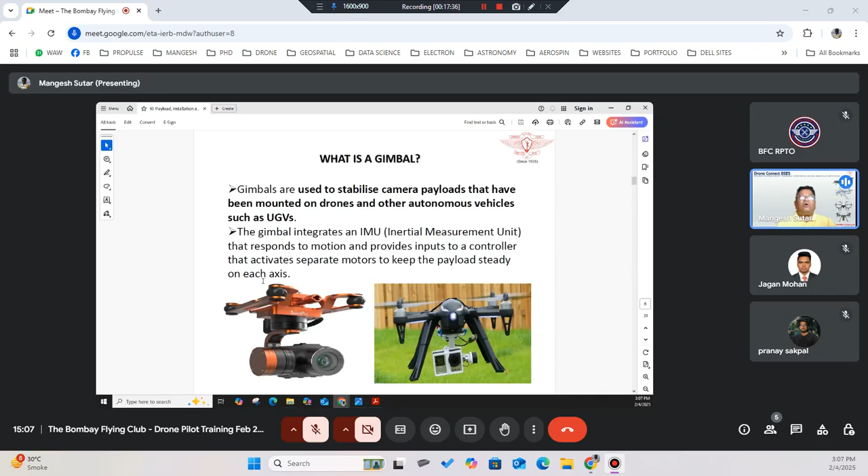Types of electro-optic payload. So different types of optical payloads you have. RGB camera is there, thermal camera is there, lidar is there, or multispectral cameras. So there are different options. The cheapest one is the RGB cameras, but from a perspective of what you are actually looking to capture, normally you will see a Sony camera attached as an RGB camera which has 20x optical zoom and 20 megapixels, or sometimes even 50 megapixel cameras are there.

Okay, then you have thermal cameras, which are very expensive. They range between 2 lakh rupees to 6 to 8 lakh rupees. Even lidars are in that range. I think lidars are somewhere around 8 lakhs, 10 lakhs, 12 lakhs, 15 lakhs, depending upon what kind of lidar it is, what purpose, and how big the lidar is. Even the multispectral cameras we use for mapping, survey, or crop monitoring applications, or even hyperspectral cameras, range somewhere around 4 lakh rupees to 10, 20 lakh rupees. Okay.

So what does RGB camera do? It's nothing but like a human eye, which is sensitive to red, green, and blue bands of light. Most standard drones come with a camera that captures the same RGB band, so the image they produce recreates almost exactly what our eye sees. It's like a normal mobile camera, but these are more optically efficient, and sensor-wise also they are more high-end, which will be able to capture the light properly so you see what you're supposed to see when looking at that object as it's been captured.

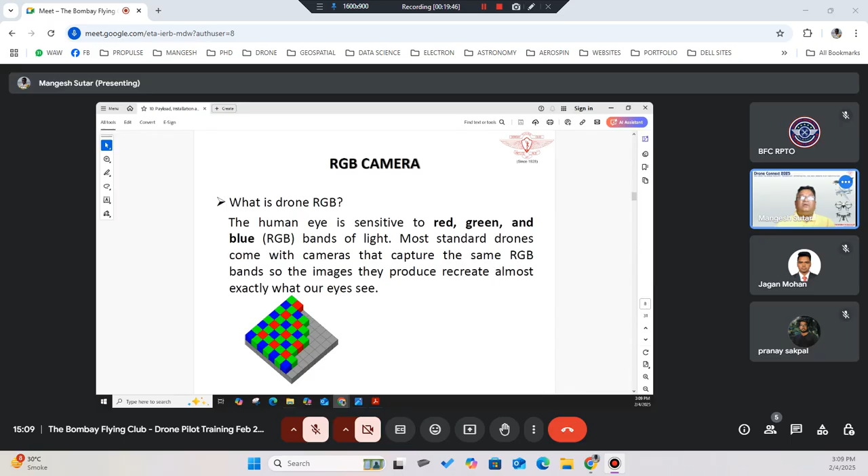So what does drone RGB mean? An RGB camera on your drone can see your entire field in one place by processing aerial images into orthomosaic maps. You can quickly make observations, enter the geodata into GPS, and drive to the problem areas without damaging your entire field.

So it will capture the data in different angles and pictures. But whatever data you see on the screen will not be immediately available in that form. There are separate softwares required, multiple softwares needed to convert that data into orthomosaic maps or three-dimensional maps. So you feed that data, those images, into the software and create that structure. You create the different types of maps required for your analysis purpose, or for any customer or vendor who has requested this kind of activity. You need to have that software.

Like there's the QGIS software, or... not Pixel, what is it called? I forgot the name, I have a slide, we'll talk about it.

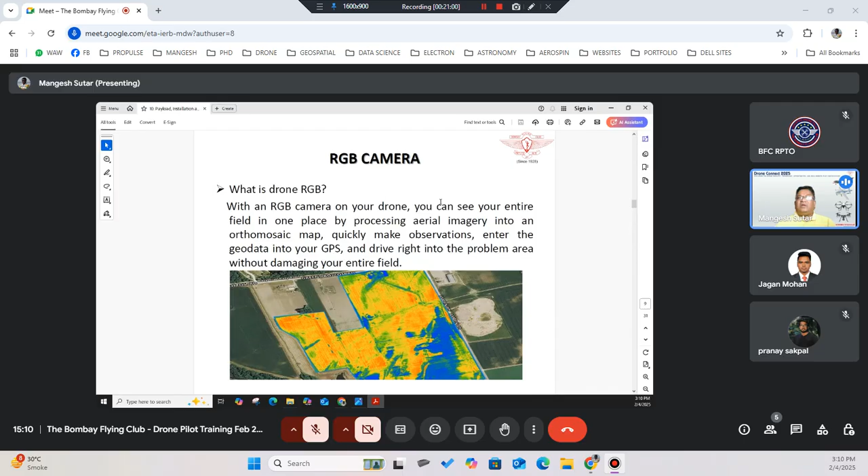So what is an RGB camera? RGB is again a visible camera sensor that collects visible light in 400 to 700 nanometers and converts that into electrical signals, organizing that information to render images and video streams.

So the image you see will be in a very raw format. There will be separate software which will convert those images into a useful format for analysis perspective. Like in the picture, there's mineralization, seed rate, soil organic matter, denitrification zone. These are the images converted using photogrammetry softwares.

The features of the payloads - when using the payload, you can capture not only photographs but also videos. There's object tracking also. But these are additional softwares which would be required.

Let's say I was seeing one of the drones where it was able to chase a car. The camera and software running on the drone has a separate unit which keeps tracking the particular device and gives signals to the drone, and it keeps tracking it.

For example, there was a chase happening between the car and police using the drone for chasing them. Earlier, people used to follow the car normally on the road, but now drones are used to track or chase particular criminal locations and vehicles. They have that facility of AI-driven cameras which identify the number plate, identify the car, and keep tracking as the object is moving.

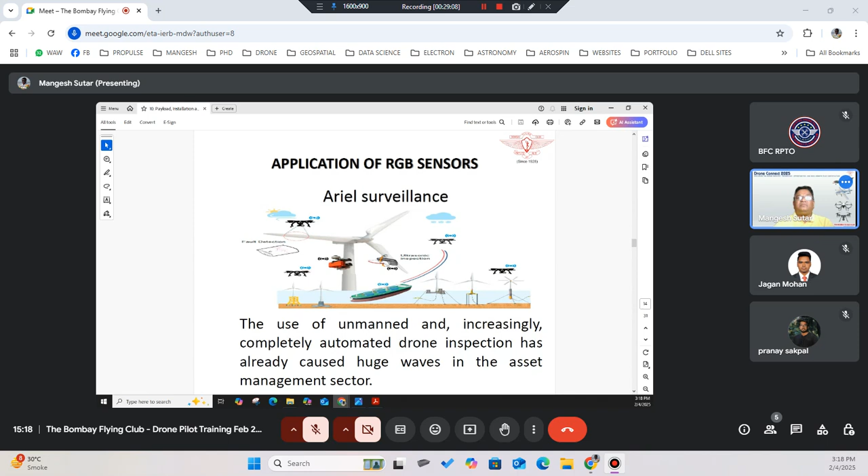Applications of RGB sensors: you can use it for solar farms, wind farms, railways, bridge inspection, power lines, mobile phone towers, oil and gas inspection, water pipes, building and construction.

We had done one small POC for Reliance. They have a refinery in Jamnagar. So all those oil and gas pipelines which flow from the refinery to X location, they asked us to fly the drone and provide data about the pipelines laid on a regular basis. It was almost 20-25 kilometers of area which needed to be covered, which was external. Most of the time these pipelines are underground or within the ground, but there were some places where they were above ground, so they wanted us to see if drones can be useful to monitor these kinds of installations, oil and gas pipelines.

A lot of times you will see these oil and gas pipelines also going through very remote, dense forest kind of areas. Even water pipes, like Mumbai is supplied water from Vaitarna or Tansa lakes, the distance it covers from those lakes till the Mumbai filtration plant is very huge. A lot of times we have seen people break the pipes or make a small hole in them, and you will always see leakages of water and loss of water. So you need to keep monitoring these pipelines on a regular basis.

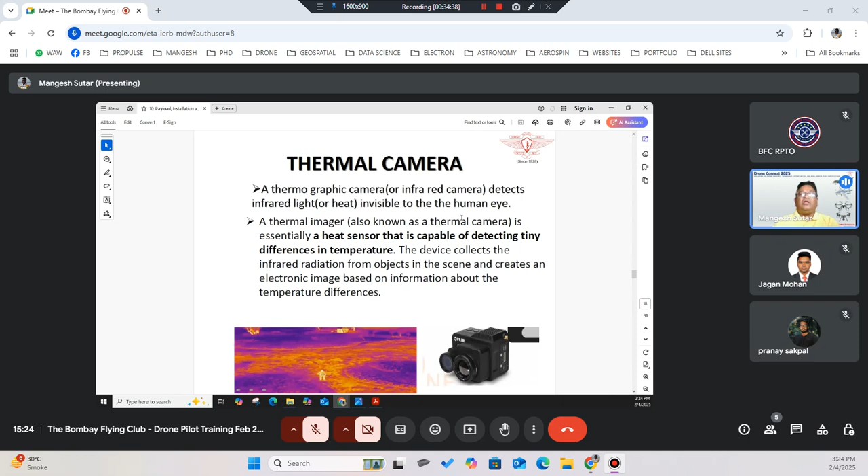Their metal has become corrosive, or wires have become corrosive - all these things are not visible to the naked eye. So in thermal images, you are able to detect these differences in temperature, because different parts of the material will give different heat signatures. These thermal cameras collect the infrared radiation from the object in the scene and create an electronic image based on the information from the temperature difference. Once you know the temperature and are able to read the thermal inputs, you will be able to tell whether there is a problem in that particular material or image, and accordingly take corrective actions.

Application of thermal payload was originally developed for surveillance and military operations. Thermal cameras right now are widely used in building inspection, like for moisture detection.

For example, there might be a leakage in your building. You won't be able to see or track from where the leakage is happening. You might see the wall has become wet, but you want to find the source from where the water is coming. You can always use thermal cameras to detect this, because the leaking part will be colder and the remaining part won't be. So you can track and find the source of the leakage, or how the water is flowing inside the walls, by seeing the temperature difference in the wall and the beams.

Again, applications include firefighting, autonomous vehicles, automatic braking, skin temperature, industrial inspections, solar panel inspection, power line inspection, pipeline inspection, and wildlife monitoring.

A lot of times, from the outside, a pipe might look good, but it might have gone bad, maybe rusted within the material. Just because of stress, the material might have gotten very weak, and it's possible the water pipeline might break one day, leading to a leakage situation. Rather than waiting for that reactive situation, we can run a thermal payload, capture images, and see how the structure of the pipe is. Based on that, we can decide whether it needs repair or remediation, so that major faults or major loss of infrastructure or resources don't happen.

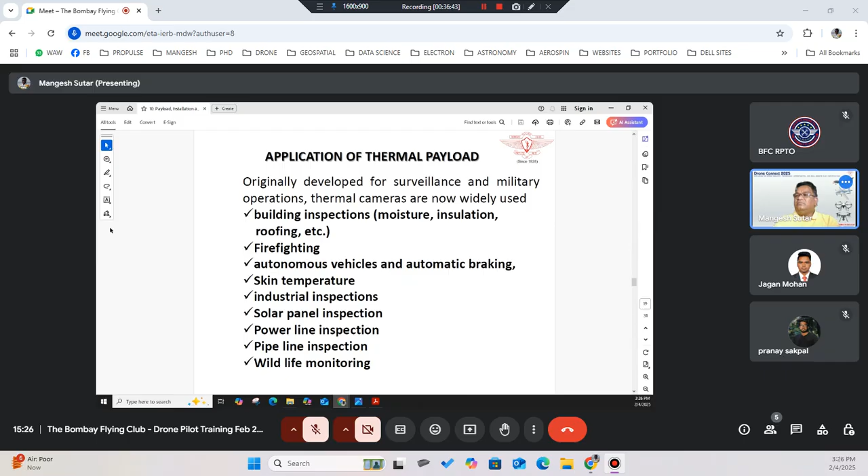You can see the picture of the building over here, showing moisture, insulation, and roofing.

In firefighting also, when there is a fire, the building shows up completely red and yellow in color. The people there are also shown in red because they have body temperature. Whereas the ground shows up in blue or violet color because it's a cold part. Even the pipe shows in blue color because there is water in that hose pipe.

Also in autonomous vehicles and automatic braking kind of applications, you're able to see the images in infrared and how they look.

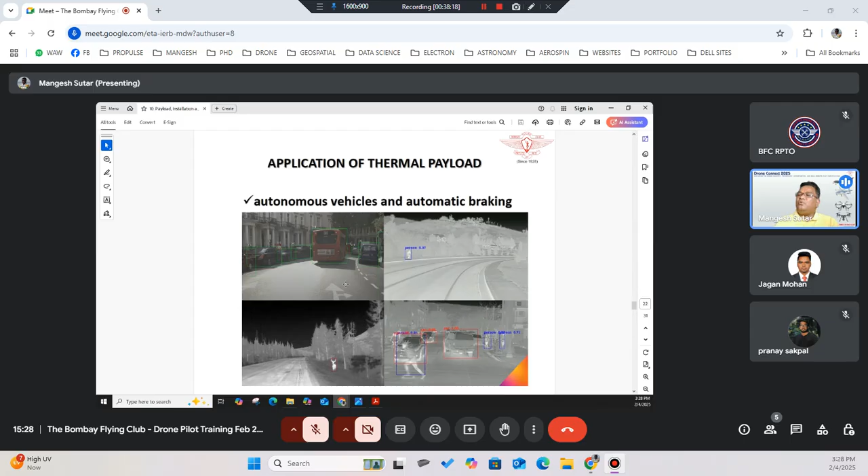There is a huge amount of study going into this. This is what we call image study or GIS study, where RGB, thermal, and lidar data are all taken together, and you train the software to interpret the data. You may have the same image in RGB, the same image in infrared, and the same image in lidar, and then try to correlate and understand what could be the anomaly in that particular image. Then you train your software accordingly, so that every time you don't need to manually find the faults or issues.

Like here, you can see the skin temperature.

This was very much in use during COVID times, where people wanted to monitor the temperature of a person, whether he had a fever or not. So without touching him, without getting in contact with him, remotely, just by flying a drone over people, you are able to take their temperature as required.

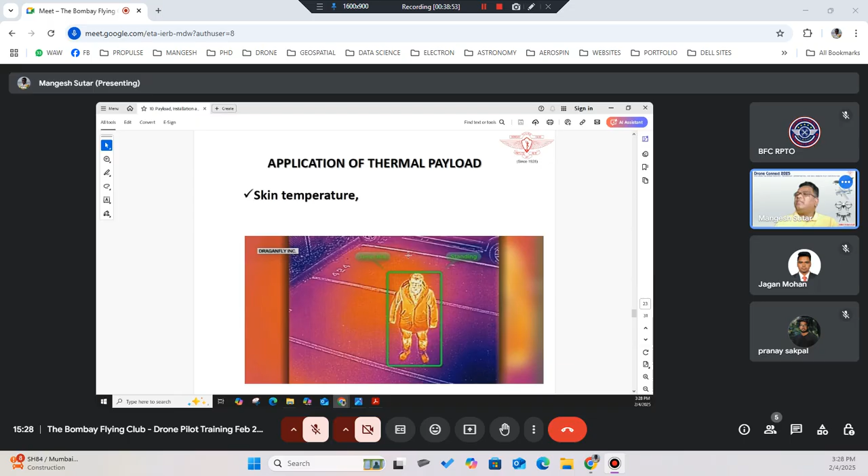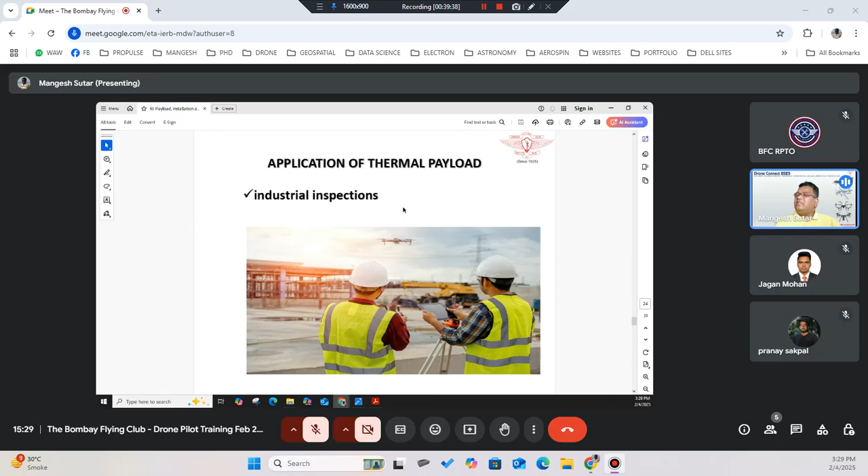Again, in industrial inspections, thermal is very much used after RGB. Thermal is very much used in construction sites, infrastructure related projects like windmills, power lines, gas and water pipelines, and industrial inspections like big manufacturing plants or refineries. In all those locations, thermal payloads and thermal cameras are being used extensively, so you don't need to monitor or physically go to all the locations. Your drone with the thermal camera is able to take complete footage, and then you can sit down, analyze all your footage and images, and accordingly make a report.

It uses light energy emitted from a laser to scan the ground and measure the variable distances. Using those signals, it tries to create the image out of it. So this is something you are doing in a reverse way. LiDAR, which stands for light detection and ranging, is a remote sensing technology. Earlier, this was primarily used in satellites, or even in surveys. People used to put the LiDAR on a car and survey the locations. But earlier LiDAR was not so much available for the drone as a payload.

But recently, a lot of development has happened in LiDAR sensors. They have become a little bit cheaper compared to what was available earlier. So they can be used on your drones as a payload, and you can start mapping the surface and acquire meteorological data. A lot of weather, geographical or geological people have started using LiDAR on drones, capturing whatever data they require. It could be meteorological data, geological data, or data for study of different types of applications: agriculture, forest, water resources, any kind of resources useful for human life to sustain at the location.

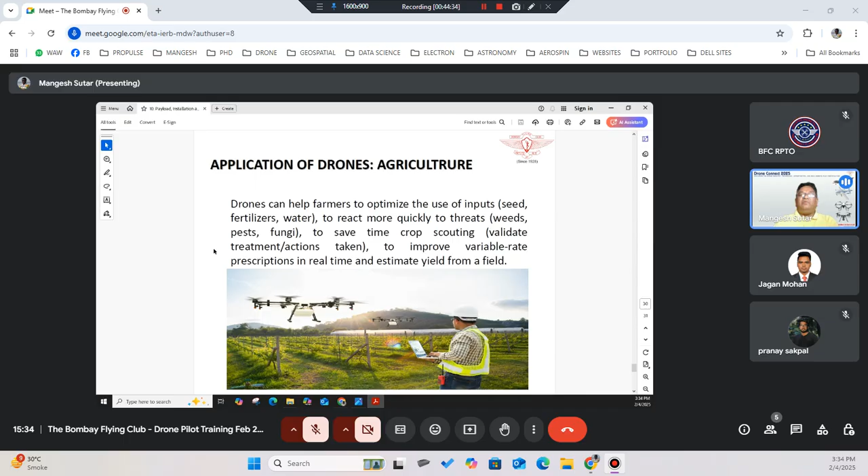You can't go to each and every plant, each and every part of a crop to see what the problem is. But if you fly a drone, it will capture the entire area and give you the data on your laptop or tablet, and you will be able to find out what problem your farm has and in which area. Maybe a small part of your farm has been impacted by a pest or some threat, fungi or weeds. So before it spreads to the entire farm, you can take corrective action in a very short time. That's the advantage of the drone: it gives a complete view of your farm on your tablet, mobile, or laptop, so that you can take timely corrective actions. Okay.

We talk about the application of drones also for advertisement or media publicity and all the things. So you can use multiple or a swarm drone technology where you can fly drones and create a lot of good images in the sky as light shows or advertisement shows.

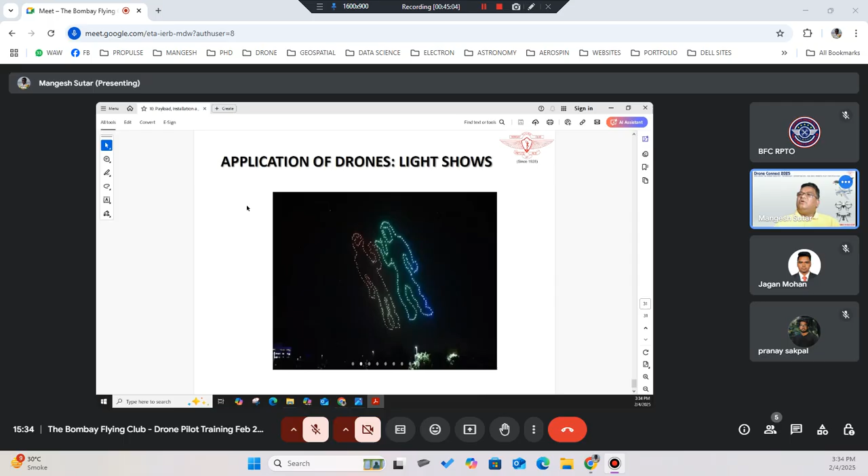Okay. Just the last application. Do you have any questions on the payloads? Yes, sir. I have.

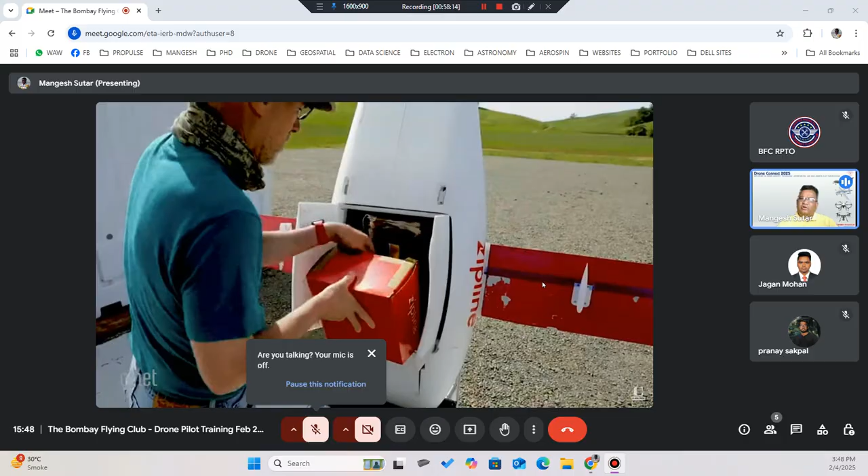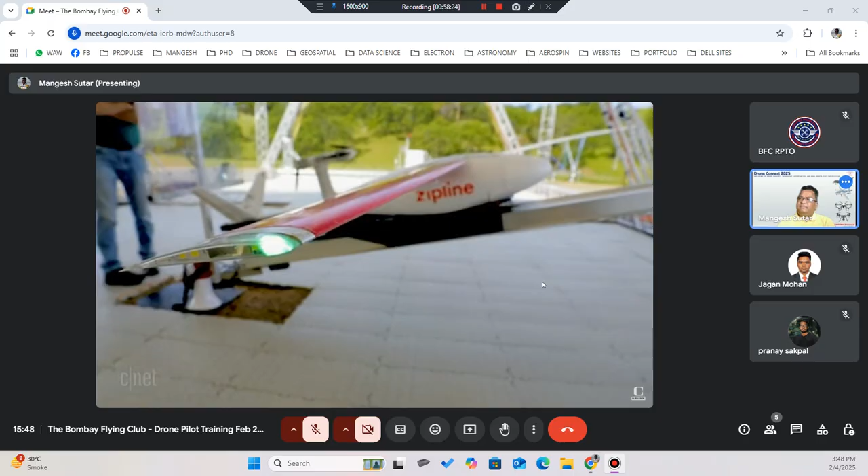Since we started operating our first system in Rwanda more than a year ago now, we've been designing our next generation system from the ground up, incorporating all that experience. Here you physically put the package. So we've had to redesign pretty much everything about the plane, and then this is our systems catapult to support scaled operations. So instead of being able to do 50 flights a day, we want to be able to do 500 flights a day from a single distribution center.

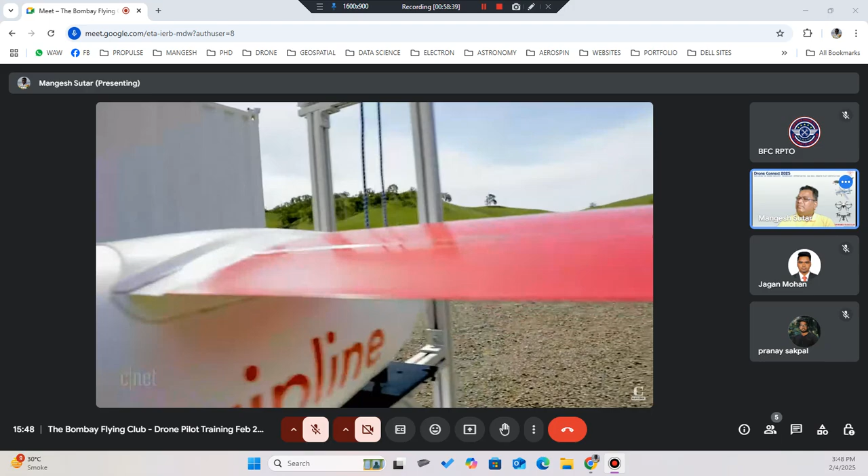We pull the blood or the medical product for that order, put it in a package, put that package into a Zip, and launch that Zip. The aircraft weighs 20 kilograms, about 45 pounds. It has about 10-foot wingspan, 3 meters, and it can carry about 3.85 pounds, 1.75 kilograms.

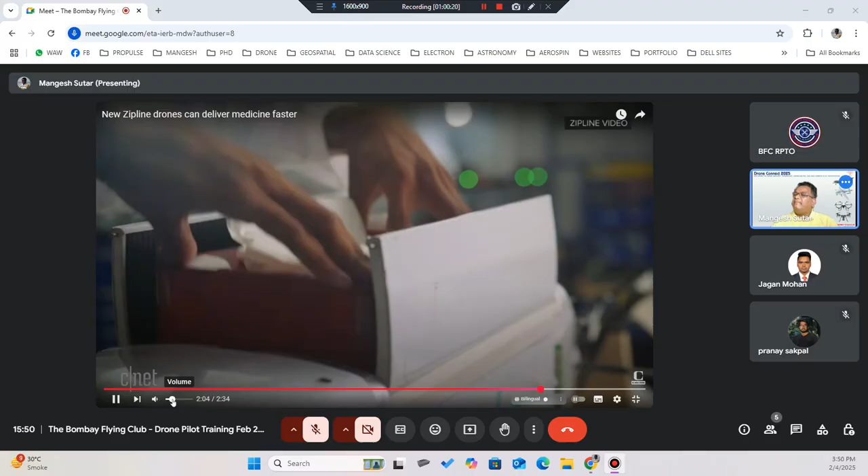Approaches to things like safety are also much easier. On our aircraft, for example, if either one of those stops working, the plane flies just fine. We're in Rwanda today, and we're expanding to cover the other half of Rwanda as we speak. From there, we are really focused on solving this problem, access to medical products at a global scale. There's access to medical product problems in the US and in the developing world, and we really want to solve all of those problems everywhere.

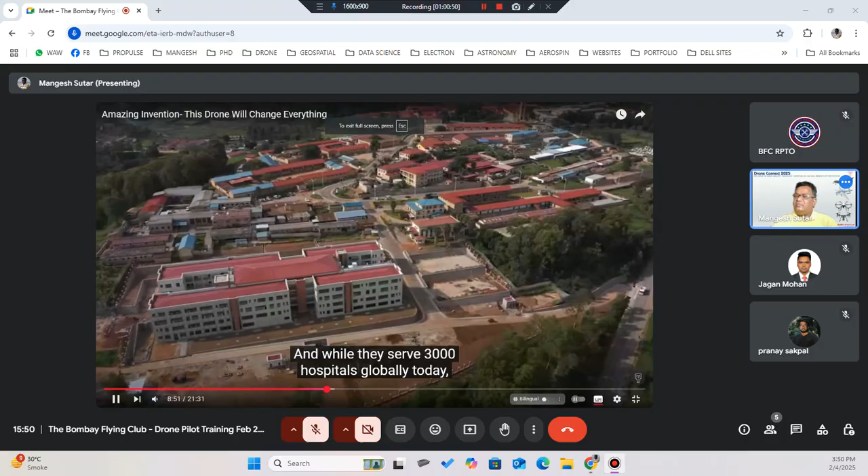And while they serve 3,000 hospitals globally today, that number will be 10,000 by the end of the year. All right, so we've covered their long-range country delivery drones, which means we've now got the context to talk about their short-range city delivery drones.

But first, I just have to interject here and say I was blown away by Rwanda as a country. Right out of the gate, their stoplights are really cool because they're just countdowns till the light turns green. They can balance and carry pretty much anything on their heads. And there's motorcycle taxis everywhere. And given that, when in Rwanda, you do as the Rwandans do. Whenever possible, that's how we got around ourselves.

I have one video which gives you the application of drones.

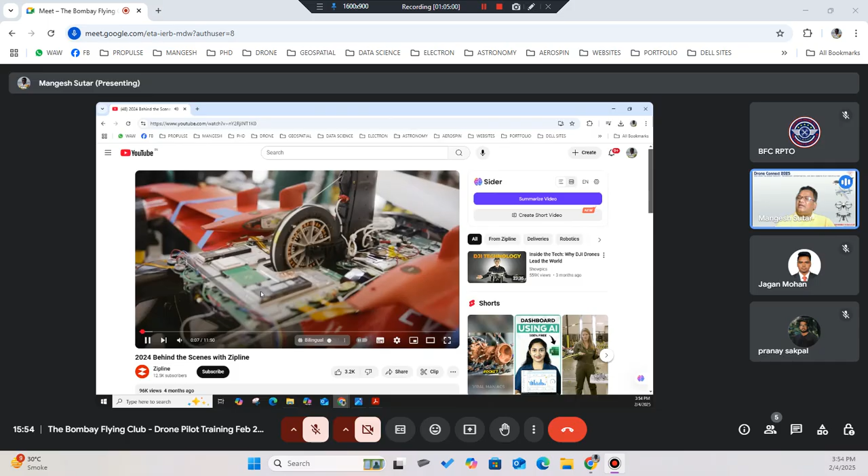This year, there will be over 5 billion instant deliveries from on-demand apps in the US. And that doesn't include the billions of packages sent by FedEx, UPS, and Amazon. Every one of these deliveries relies on infrastructure that's 100 years old. It's slow, expensive, and terrible for the environment. It wasn't built to keep up with today's demand. With a better system in place, one that's actually built for the 21st century, we believe the demand for delivery will grow by another 100x and transform the businesses that capitalize on this shift.

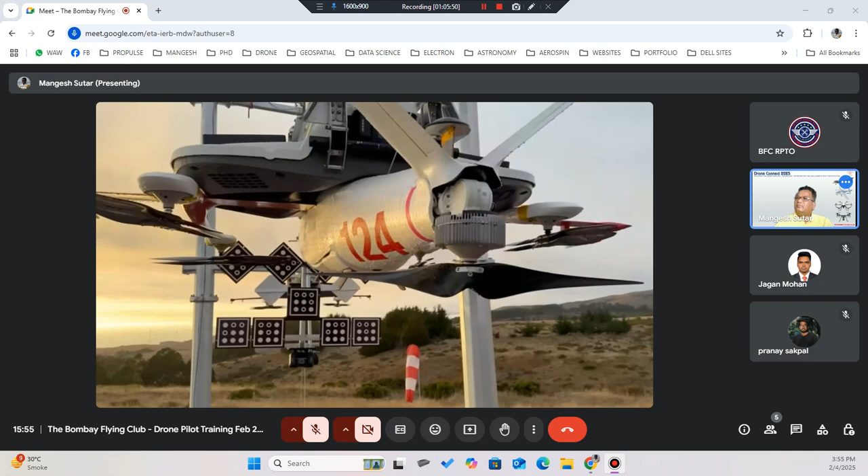But we don't have 100 times more humans to drive cars all day. Our roads can't handle 100 times more traffic. And the last thing our planet needs is 100 times more pollution. Automation and zero-emission vehicles are the answer. That's why we built Platform 2, to fully automate home delivery. These zero-emission aircraft are 10 times faster and significantly less expensive than traditional delivery that uses a 4,000-pound gas combustion car. And we're investing in all the auxiliary software, ground systems, and infrastructure that will enable Zipline to make millions

of deliveries a day. Soon, everyone will be able to use this new service to get instant delivery of medicine, groceries, wellness essentials, dinner for the whole family, and more, teleported directly to your home in minutes. Our team has 10 years of experience making more than 1 million commercial autonomous deliveries and flying more than 80 million autonomous miles.

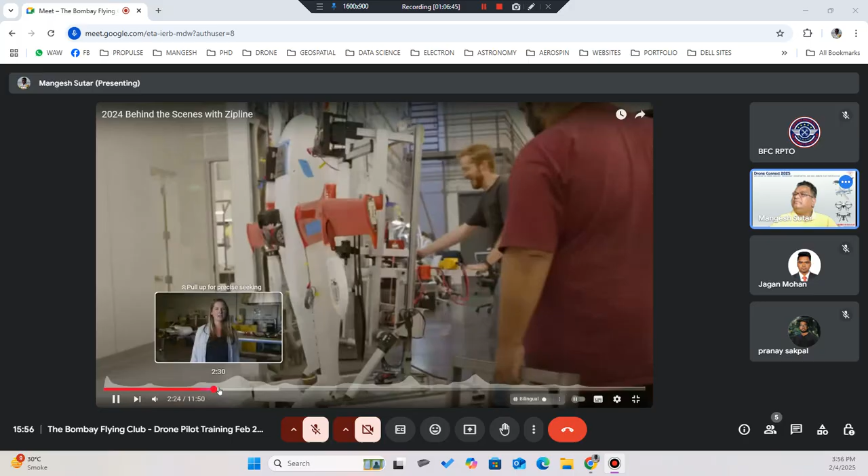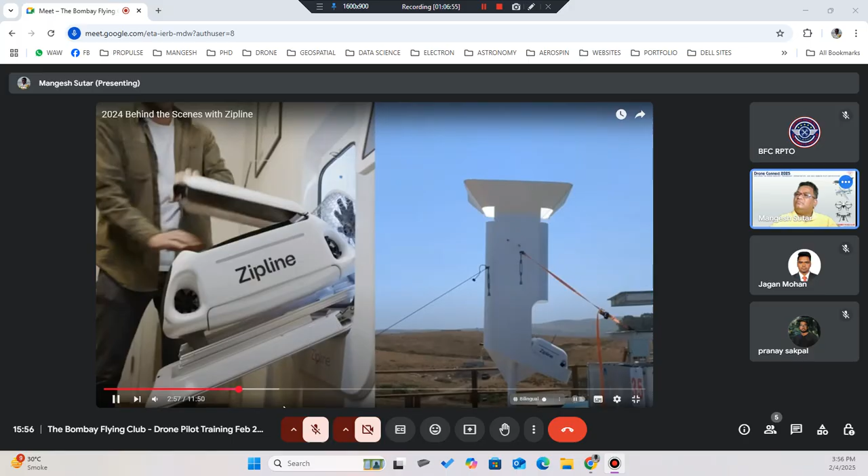For loading, using either an indoor or an outdoor loading portal. It takes just a few seconds to load and send the order. The system then does automatic safety checks before the droid goes back into the zip, and then the zip takes off. At the delivery location, the zip stays high in the sky, safely and quietly out of the way.

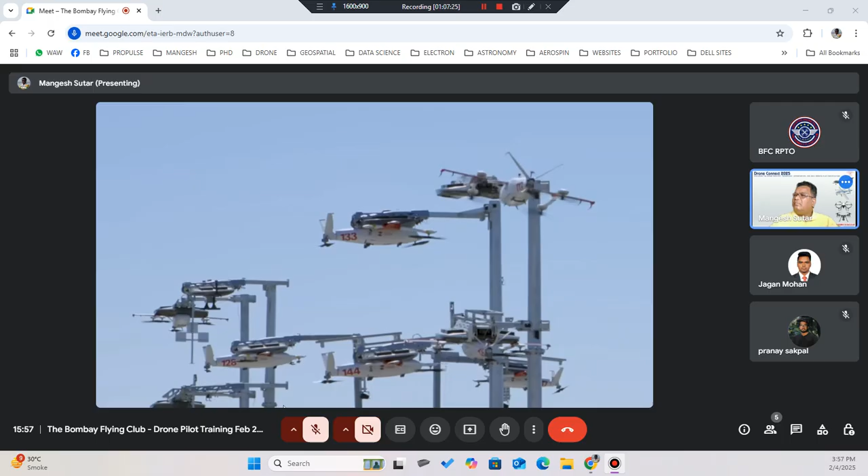The droid descends from the zip on a tether and self-navigates to its precise delivery spot. The droid then gently delivers the package and turns back up into the zip. The delivery itself takes just a few moments, and then the zip is back on its way to a dock to charge. It's all pretty mind-blowing when you see it in person, but eventually you think it's going to be normal, boring, everyday delivery, only much faster and better for the environment.

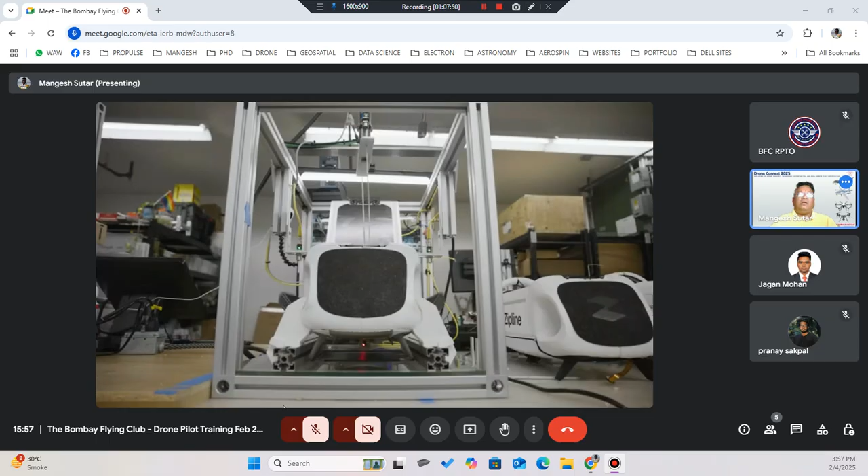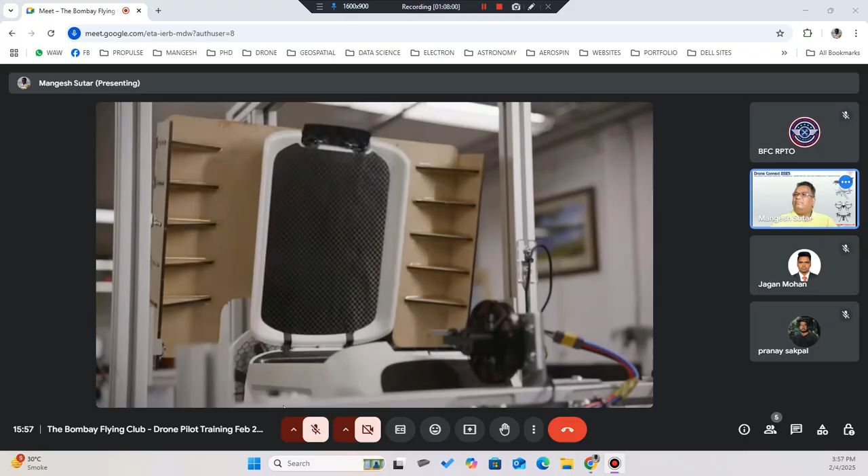To get there, this technology has to be as reliable as humanly and robotically possible. So, over the past year, we've been putting our hardware and our software through rigorous around-the-clock testing. Right now, we're doing thousands of tests every day on each and every component. Cycle testing on our roll tilt, motor spin testing in our wind cannon, wingtip light function testing, grid door testing, vibration and pogo testing on our primary structures, and so much more.

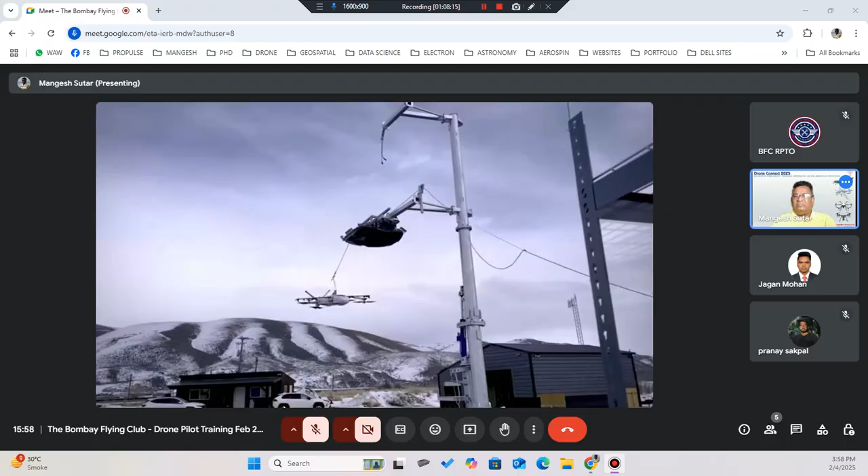To prepare for both icing conditions and extreme heat, we run thermal chamber tests from -50 to 170 degrees Fahrenheit. And we're also doing full flight testing in cold Wyoming winters and hot California summers. We're also running millions of simulations for every scenario our zips might encounter in the skies, no matter how unlikely. We push our zips way past their limits, so we know where their limits are. This testing helps us ensure our aircraft are safe and reliable before ever flying in your community.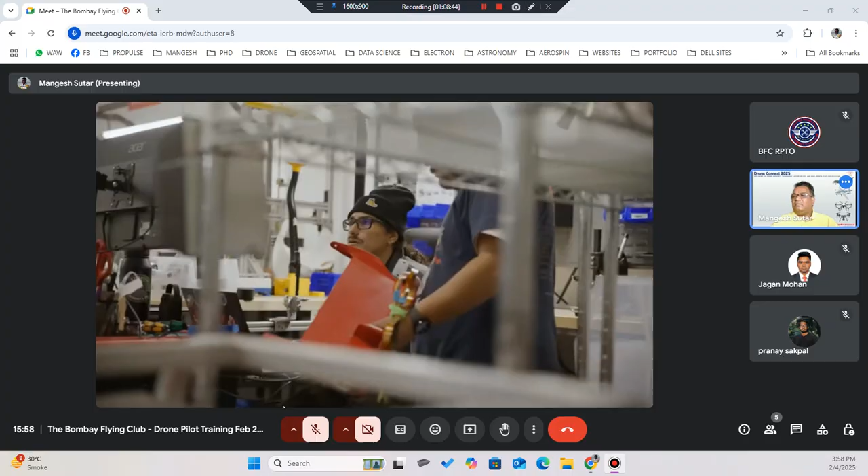Even the smallest screw has been put through hundreds of tests to ensure performance and dependability. And if we make a change to a certain part of our drone, we test everything all over again until we're absolutely confident it's safe and reliable to do tens of thousands of flights. We've taken the same rigorous approach to working with our partners, iterating side by side with our early adopters to make sure we've built something that's just as easy to use for our businesses as it is for their customers.

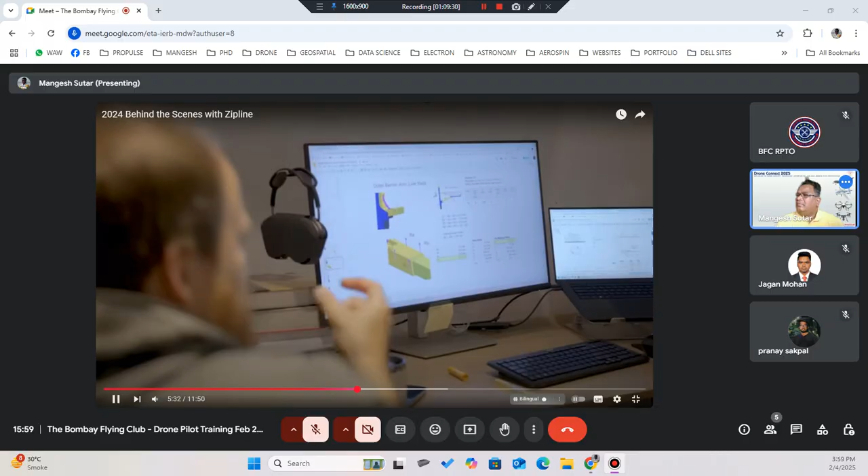Hi, I'm Donovan. I'm here at the aviary, Zipline's headquarters in South San Francisco. This is where hundreds of our teammates come together to build the technology behind the world's largest autonomous delivery service. One of my favorite things about working at Zipline is that we have so many types of experts here, from aviation to autonomy, mechanical engineering, customer experience design. It also means we get to see some really cool stuff each day. Let's go take a look.

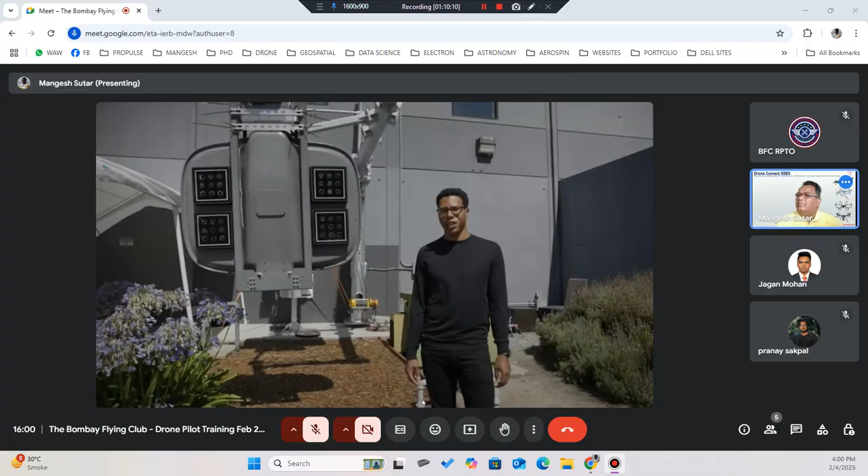In true Zipline spirit, we make use of all the space we have. This is where we do droid delivery testing to make sure we can avoid obstacles and deliver as precisely as possible. This is an early prototype of one of our docking stations. It's where Zips dock and charge while operations teams load packages. As you can see, it's currently folded down, which makes it easy to do maintenance. You've seen the docking station. Now let's go inside to see the loading portal.

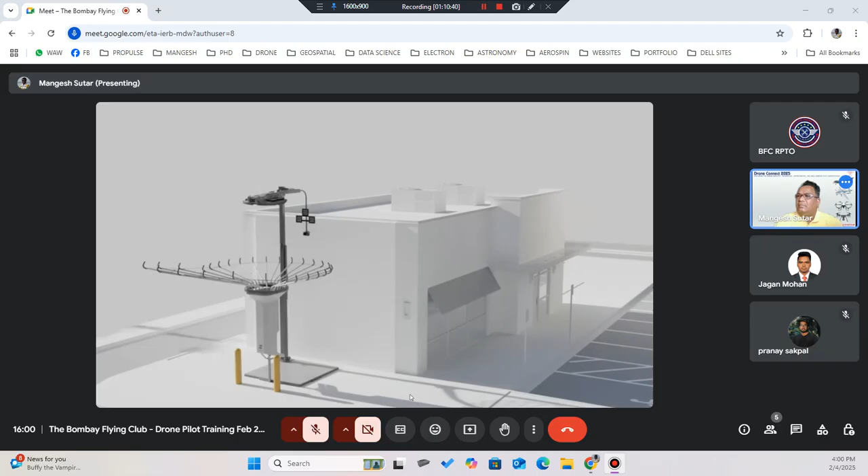When our network of Zips serve a particular region, they automatically shift around the area based on demand. That means in the morning, the Zip may be delivering donuts for the office, then move to a salad shop for the lunch rush, and finish its day delivering allergy medicine from the grocery store. After a business signs up, we have easy-to-use loading portals so they can send deliveries. The portals can be inside, outside, or even on the roof. We customize installations based on the building and how much delivery capacity is needed.

Once it's set up, businesses can choose to take orders via the Zipline app, offer Zipline as a delivery option for orders placed on their own site, or both. We also take extra precautions for healthcare deliveries. We use a dedicated fleet of Zips for transporting medical supplies, and we don't collect sensitive healthcare data. No matter the type of order, they're loaded into the droid in a matter of seconds.

The droids fit a lot. Dinner for the whole family, or that grocery list that feels like too much to go without, but not enough to pile the kids into the car for a trip to the store. To ensure we're a welcome addition to any community, we focused on making our technology fast, safe, quiet, and easy to use. No matter the industry, our service is built to delight customers.

I'm really excited to show you what it looks like when a droid comes and delivers in your yard. We think this delivery experience is just absolutely magical. A big part of magical is being quiet. What's that sound? Are you mowing your lawn? There you go, put it off!

Thank you! So right now the Zip is way overhead, and the droid is coming in to make a delivery right behind me, and you barely even hear it. There it is, the door's open. If it had a package it would have left it, and there it is. That's the whole delivery experience.

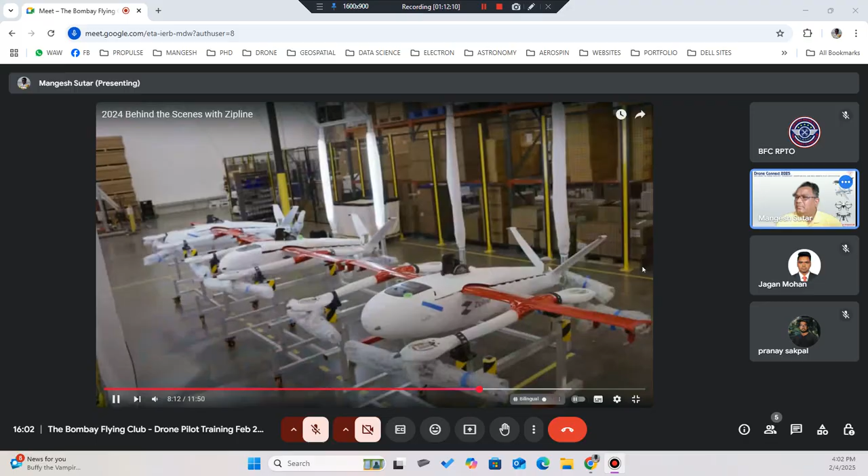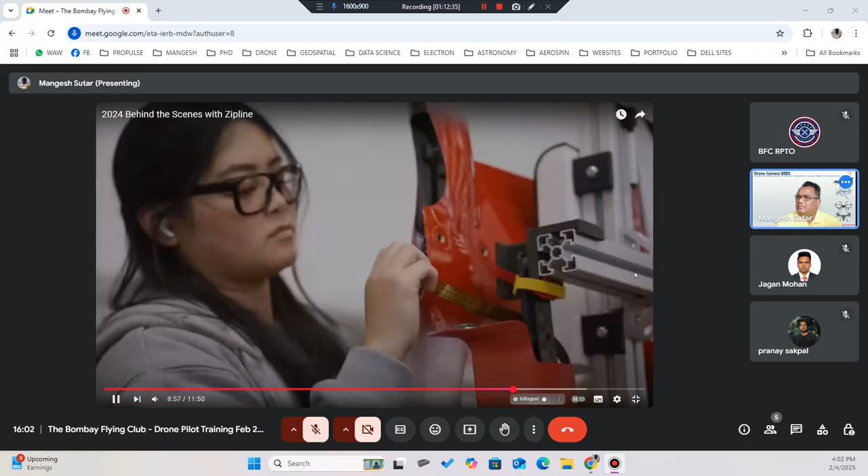You may know Zipline's technology, the lives we've saved all over the world, or the wow factor of our delivery. But what you might not know is that we're also manufacturing in the United States. I'm Kevin Malloy, Head of Material Planning and Manufacturing Operations at Zipline. Let me show you where we've been manufacturing droids, and every single Zip starts here, at a facility that was built from the ground up to ensure that we deliver on our mission. We manufacture close to our design, reliability tests, and operations engineering teams, so that we get a steady feedback loop between what we design, what we learn from testing, and what we make.

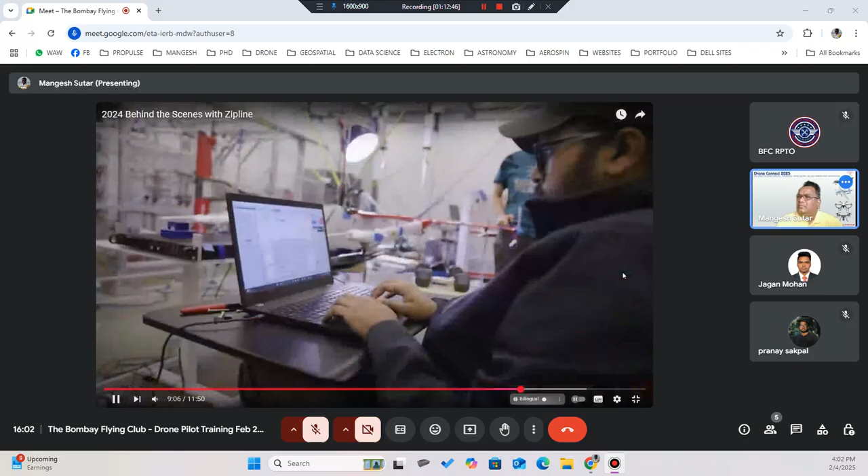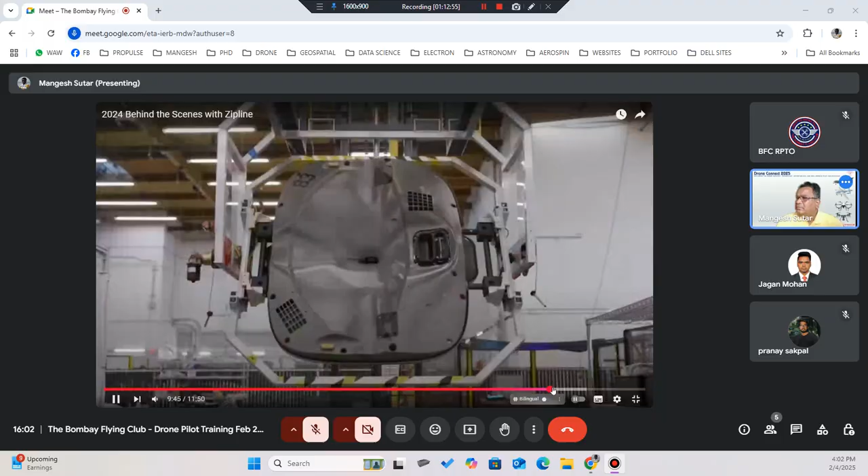Automated delivery marks a major shift in logistics: 10 times faster, zero emission, dramatically less expensive. Our mission is to approximate teleportation. Anyone on Earth should be able to press a button on their phone and get what they need just a few minutes later, no matter where they live. Zipline's home delivery service will feel that magical. We're going to make delivery feel like the internet, instantaneous and universally accessible.

We'll get cars off the road, improve air quality, expand access to healthcare, and free up time for busy families. In 10 years, people will wonder how the world ever waited 2 days, even 2 hours, to receive deliveries. Or how it made sense to order a private taxi for your burrito. Or that you need a car at all in order to access basic necessities like food or medicine. Once people experience the magic of the delivery service that feels like teleportation, there's no way they're going to be willing to go back to old, slow, inconvenient systems of the past.

Thanks for believing in us and supporting our mission. Automated delivery is the future of logistics, and we're excited for you to experience it firsthand.